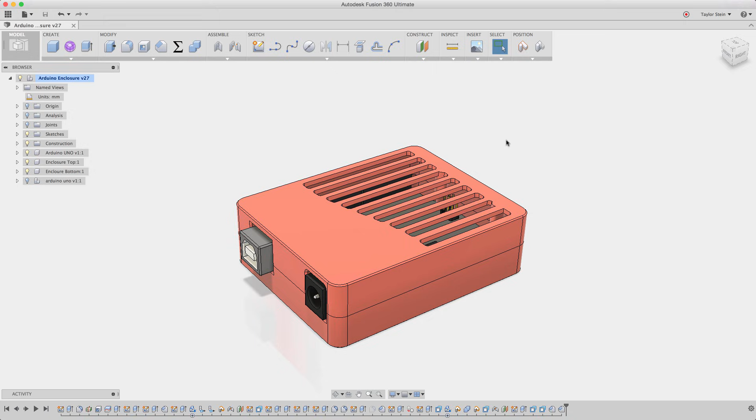Hey everyone, in this Fusion 360 video, I'm going to be teaching you how to design an enclosure for an Arduino Uno. I'm going to be recording myself along the way so you can see how fast it is, see my thought process throughout, see the mistakes I know I'm going to make and how I fix those mistakes, and hopefully learn a thing or two along the way.

So let's get started by creating a blank design. I'm going to start off by creating a sketch that really drives most of my design for this enclosure. I'll start by making a 2-point rectangle. Under Sketch, I'll choose 2-point rectangle, and I'm referencing some dimension drawings that I have.

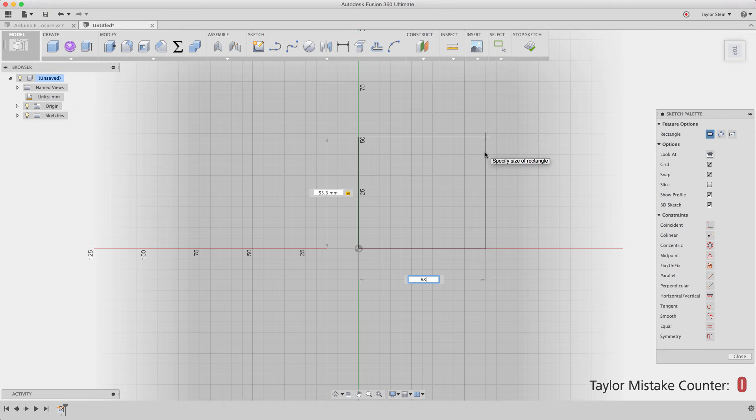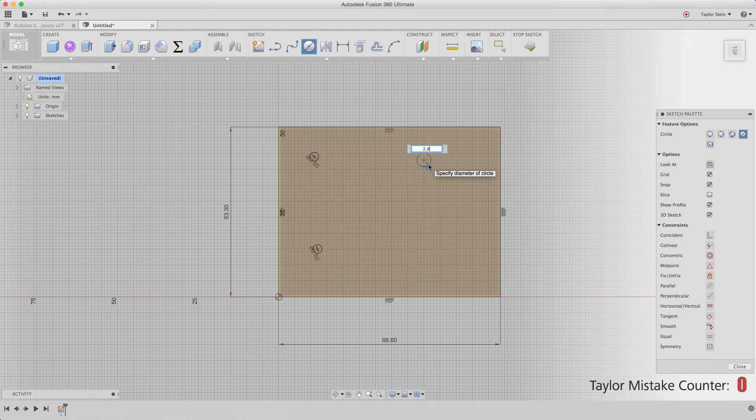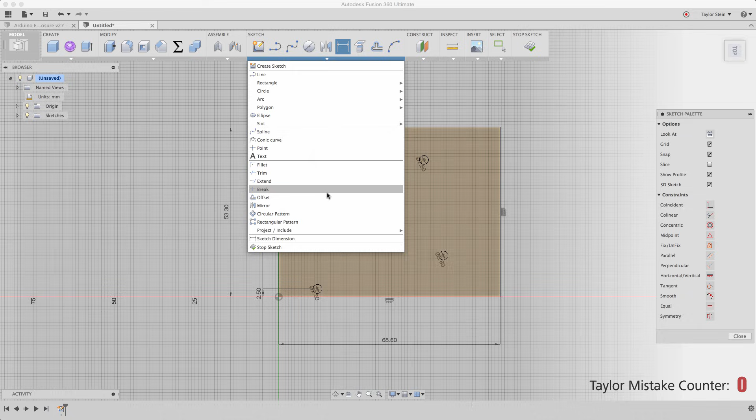Now, using that same dimension drawing, I can dimension these relative to my Arduino. I'm going to dimension that distance from there to here to be 2.5. Again, this is all under Sketch and Sketch Dimension. Now I'm going to dimension the distance from that center point to here, and that's 14. I'm going to repeat the command and dimension there to here, and that is actually 15.3. I made the mistake of thinking that was 14 as well. It's not. I made an enclosure that didn't fit. So make sure those are different distances.

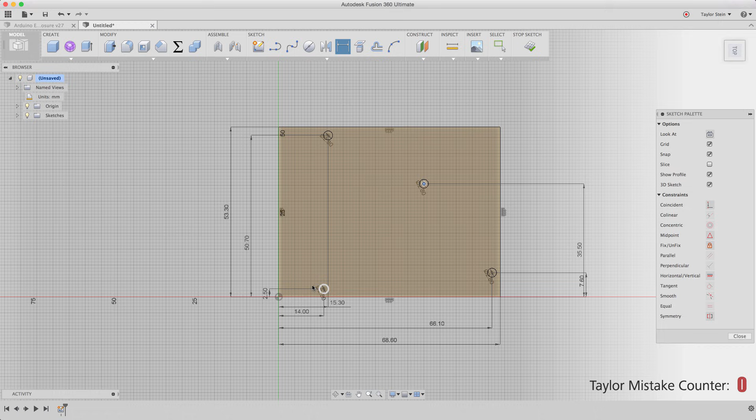I will set the distance from here to here to be 50.7. I'm going to go ahead and do the same thing for these. So this distance is going to be 35.5. It is best practice to dimension from two common edges, it makes it a little bit cleaner. And this one is 7.6. And lastly, we have a few more dimensions. Here to here is going to be 66.1. And this one is actually vertical from the other one, so this is 66.1 as well.

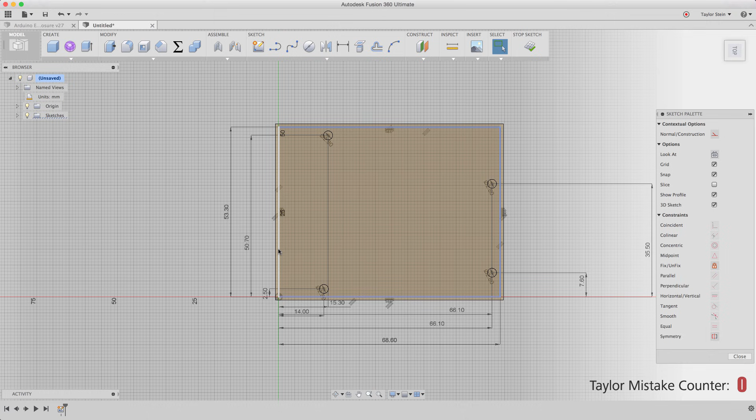So now I have the holes dimensioned up. I'm going to be building the enclosure around my Arduino, and I want it to have a little bit of wiggle room. I don't want it to have to fit perfectly within the enclosure, so I'm going to use the offset tool to offset this out by just 1 millimeter to give a little bit of space. Now I'll select these edges by shift selecting them, right click, and choose normal/construction to make them construction lines. I'll click stop sketch, and now I can choose extrude to extrude these profiles up.

Let me select these profiles, and this is really just the main form of my enclosure. I'm going to go with 22 millimeters tall, and there we have it.

The next thing I'm going to do is shell out my body. Let me go ahead and choose shell. What body do I want to shell? Well, it's the one I just created, so I'll click that. How thick? If I make it 1.6 millimeters, it'll actually just take two shells of a 3D print, with a 0.4 millimeter nozzle it's two shells, and I want to shell outside, so I'll click OK.

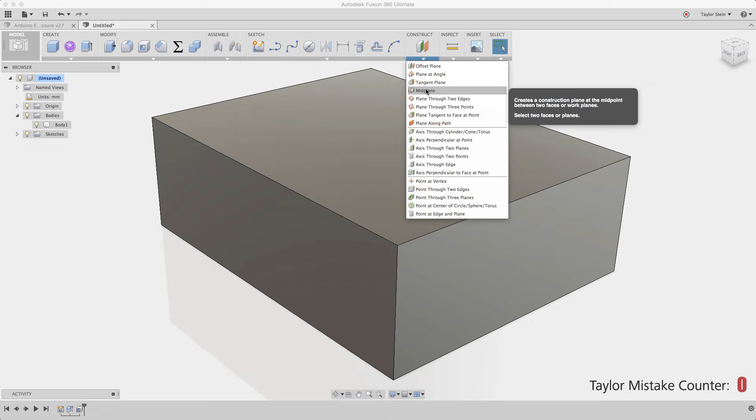Now I want to split this in half, so I'm going to create a construction plane that's a mid-plane between the top and bottom half, and now that will adjust to whatever size box I have. Let me go ahead and split the body with that plane, and now I have a top and a bottom half. I can turn off my construction plane.

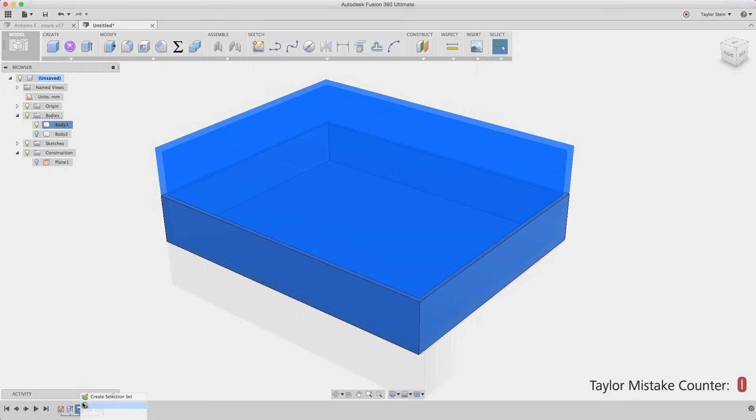And that looks a little thin. I might have messed up the shell, so let me right click on the shell command and choose edit. And what do you know, I did. So I'll make that 1.6, not 1. And outside, because I don't want to swallow up any of the Arduino, I want to create a shell outside of it. Now I have my proper shell that way.

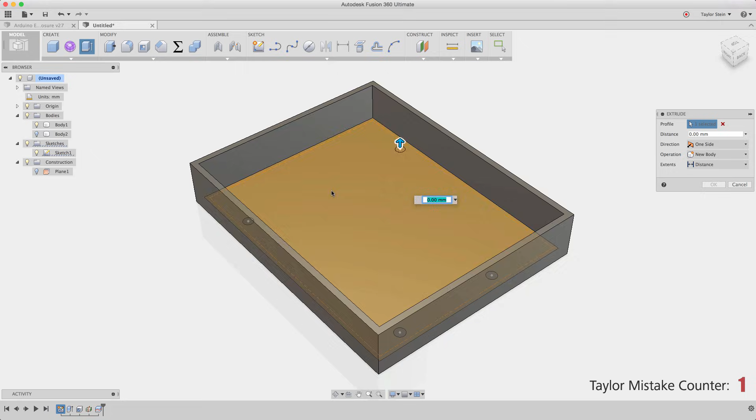Now I'm going to turn the visibility of my sketch back on, and I'm going to extrude these circles that I drew to create those mounting pins that are going to go through the mounting holes of my Arduino.

I'm going to extrude them up. I know to this surface it's going to be 11, which is half of 22, but I really want them to extend further so they can actually snap with the top part of this enclosure and hold it all in place. So I'm going to extrude 4 millimeters past this top surface, and there we go.

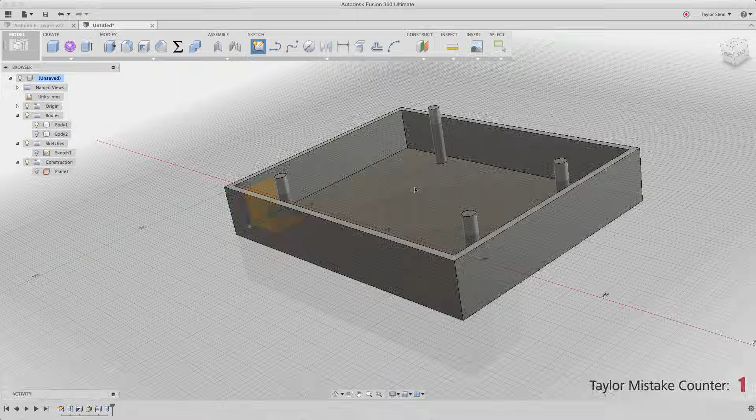The last step I have is to create some standoffs. I'm going to create a sketch on this bottom face and draw in some standoffs. Standoffs really help support the Arduino and bring it to a certain height. I'm going to make them 4 millimeters in diameter.

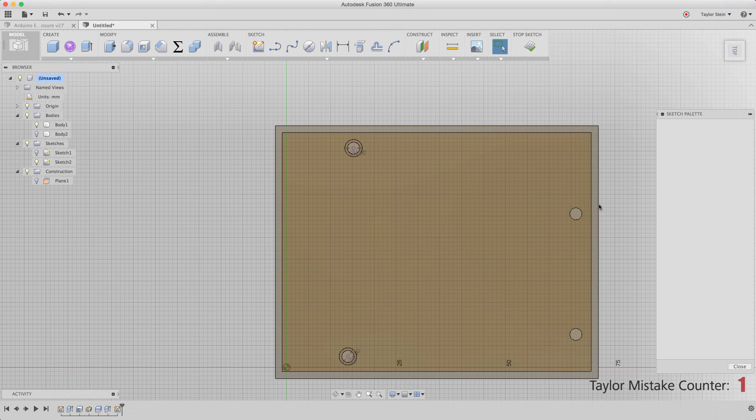This is because the Arduino doesn't lay perfectly flat on the bottom of the PCB. You have a bunch of extra metal and solder on the underneath side from all the connections, so you don't really want to place it on the bottom of your enclosure because it's hard for it to stay flat and hard to position all your holes for inputs and outputs. By using these standoffs, you allow yourself to raise it off the bottom floor of your enclosure and accurately create some cutouts.

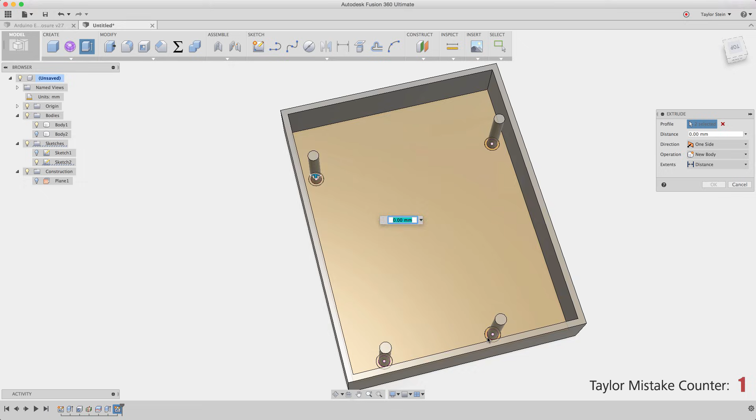Now I'm going to extrude these profiles up. If you take some measurements of an Arduino, you'll see that about 4 millimeters should be enough. Looks like I selected the wrong profile here, so if I hold Command, I can deselect that one and change it to that outer profile, and 4 millimeters should be enough. And there we have it.

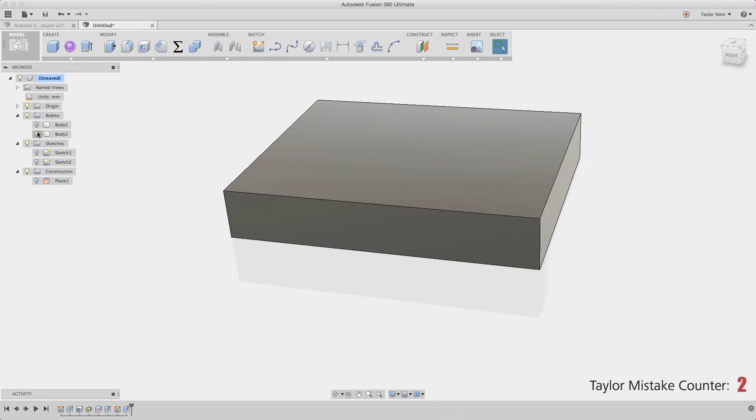The next step I have is to create some receiving parts on the top half of this box. I actually noticed I forgot to add some fillets here, so it doesn't look too nice, and I've already shelled it. If I filleted the outside here, I'd lose that uniform wall thickness, which would be pretty messy.

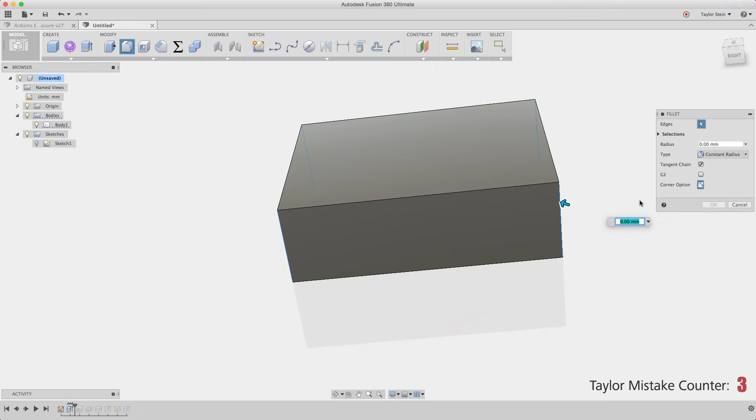So I'm going to drag my timeline behind that shell command, and now I'll apply a fillet here. That way I keep that nice uniform wall thickness, and I don't have to undo anything - I can just add a fillet. Maybe I'll make it 3, hit enter, and now I'll run to the end of my timeline. I can hide the top or the bottom, and you'll see we have that uniform wall thickness.

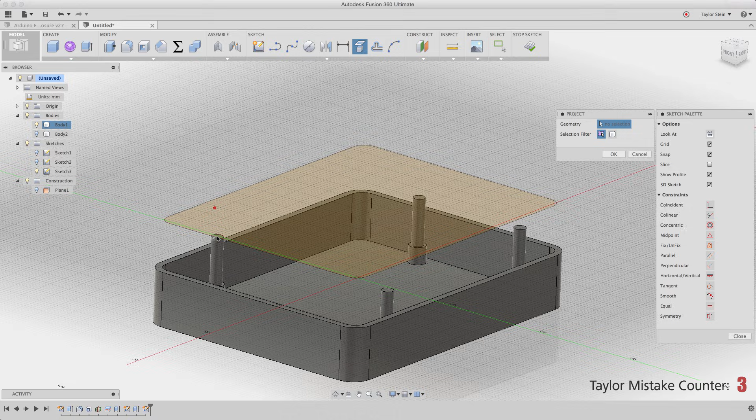Now what I'm going to do is create a sketch on this face, and I want to project in the pins that I already have so I can reference them. I'll choose project, and select that surface along with this one and this one. I'll hide that body, and now I have those profiles - I'm going to select them, and just make them construction lines so they don't get in the way of any profiles. Now they're just there for reference.

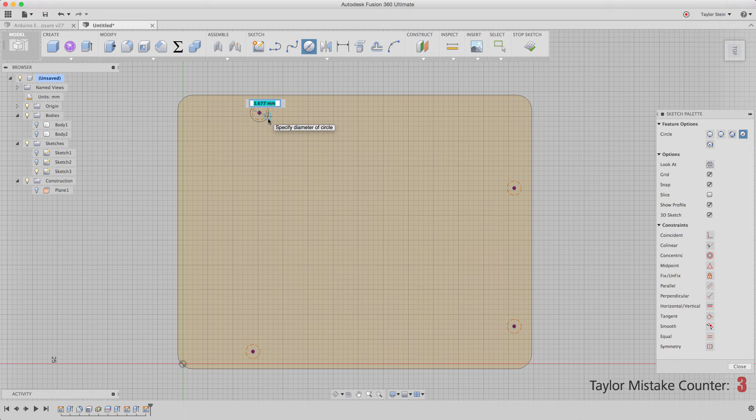Now I'll make the hole for what those pins go into, and I'm going to make this a 3.2 millimeter hole. If you remember, my mounting pins were 2.8, so you can learn the hard way that if you make the mounting holes 2.8 as well, it's not going to fit in there - you'll have a hard time snapping this lid together. So I'm going to give it a little bit of clearance so everything fits nicely.

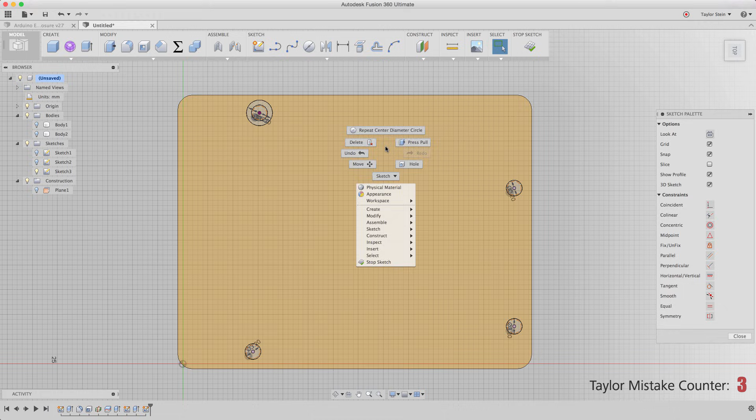Now I'm going to make this 5.2, that way these receiving portions are actually 1 millimeter thick around in radius, or offsetting the diameter by 2 millimeters - so 5.2. I'll do the same over here, 5.2.

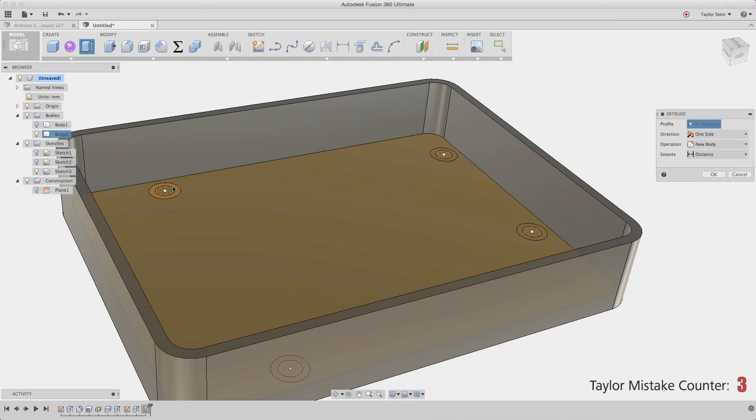I'll click Stop Sketch and turn on the top part of my enclosure. I'll extrude these profiles. How far do I want to extrude? Well, it's 11 to this top part, and I know I have 4 millimeters of overlap from the pins. I may want to offset this, maybe just make it 10 millimeters so they're slightly lower than where this is splitting, just to keep things clean. And I still have 3 millimeters of intersection between them.

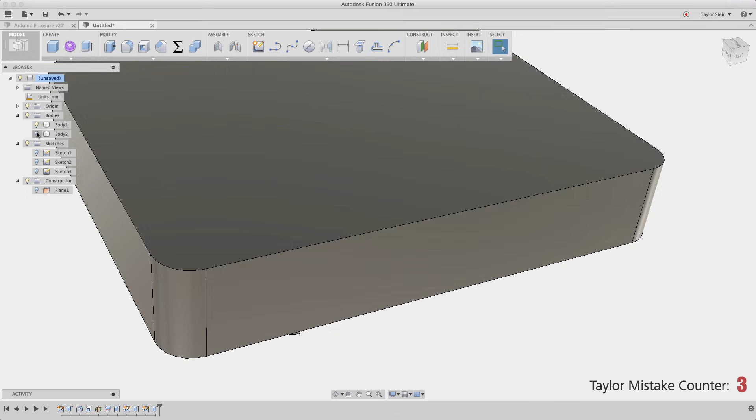Now if I come over here, one quick thing I'm going to do is add a small chamfer. I like these to ease into the slot, so I'm going to choose chamfer and chamfer off the top of these pins so we can gradually push them in. If I do a 0.4 millimeter chamfer, that'll be nice - it's a factor of my layer height, which is 0.2 millimeters, so it should create that chamfer no problem.

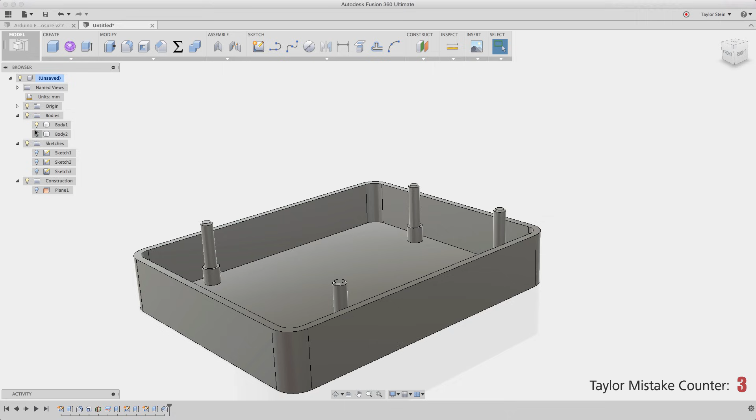The next step I have is bringing in an Arduino. So I went ahead and downloaded this online, imported it to my project, and now I can right click and choose Insert. So let me bring in this Arduino.

And there it is, I'll click OK. I'll close the data panel, and I'll quickly create some components out of the bodies. That way I can actually create an assembly.

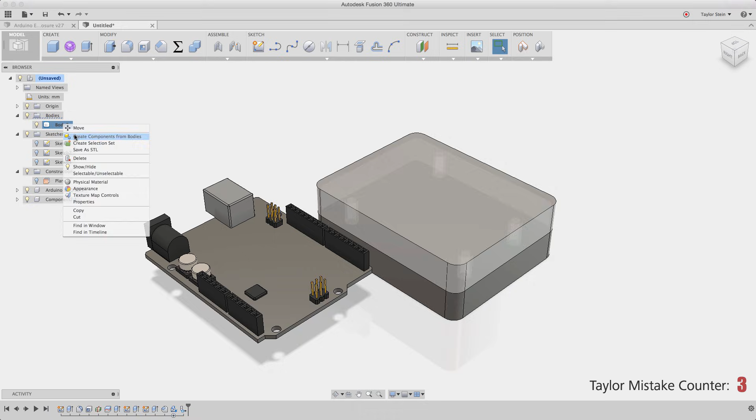I'll right click and choose Create Components, and now you can see I can move the parts all over the place. So I'll click and rename this to be Enclosure Bottom, and this one Enclosure Top. I'll right click on the bottom and choose Ground so it doesn't go anywhere.

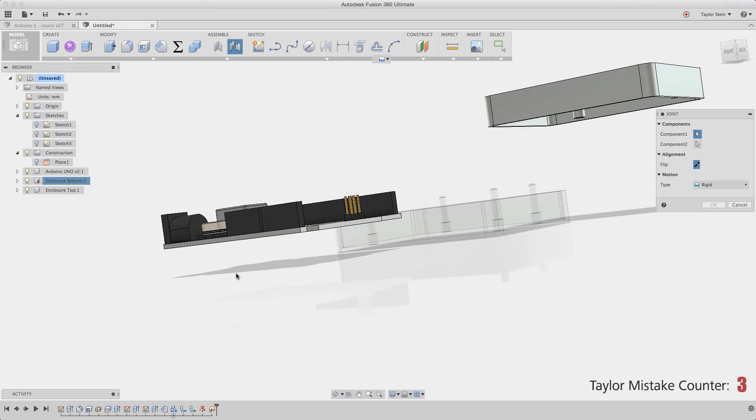Now I can apply a joint. So which pieces of geometry do I want to align? Let's align the bottom of this hole to the top of this standoff right here. Let me orbit around, and how about like that? Now you'll see that it brings those two pieces of geometry together.

I have a rigid joint, and let's look at it from the top. Everything looks great, so I'll click OK.

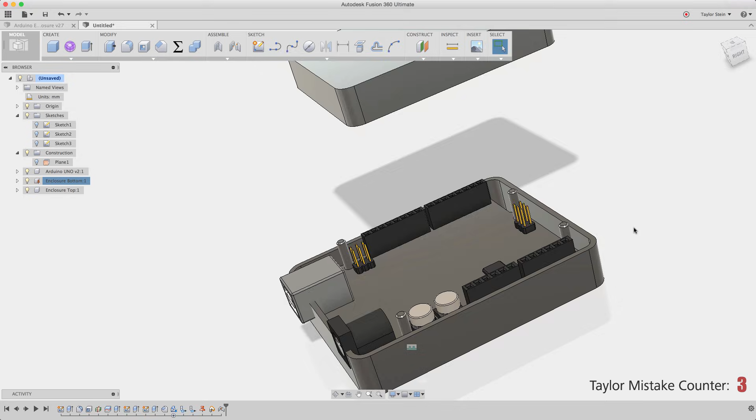Now I can add one more joint to place the lid on here. I'll choose joint, and let's align that with... let's zoom in. Let's see if that worked. Oops, let me try it one more time. Repeat joint, and let's go with that point and that point. There we go.

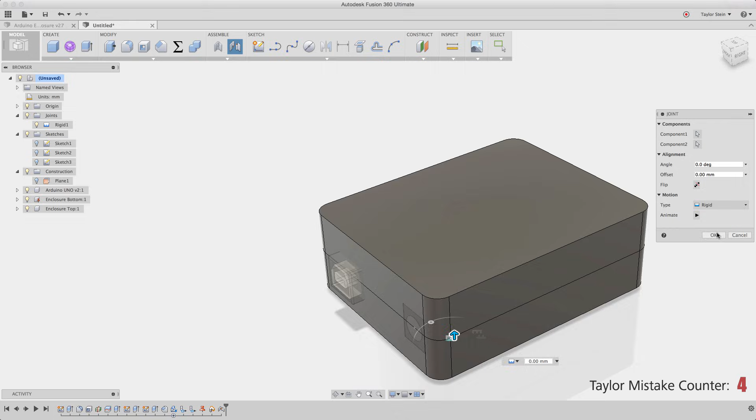I'll do rigid. I could do slider to kind of animate it moving up and down, but I'll leave this at rigid and do some animations later. So there we have it. We have the top and bottom in place. We have an Arduino in there and it looks great.

A few things we need to do are make some cutouts. So I'm going to create an offset plane on this surface, then create a sketch on that offset plane. The reason I didn't sketch on this face is I didn't want to bring in this geometry necessarily. I just wanted a clean sketch on that face without bringing it in. So that's a little bit of a tip right there.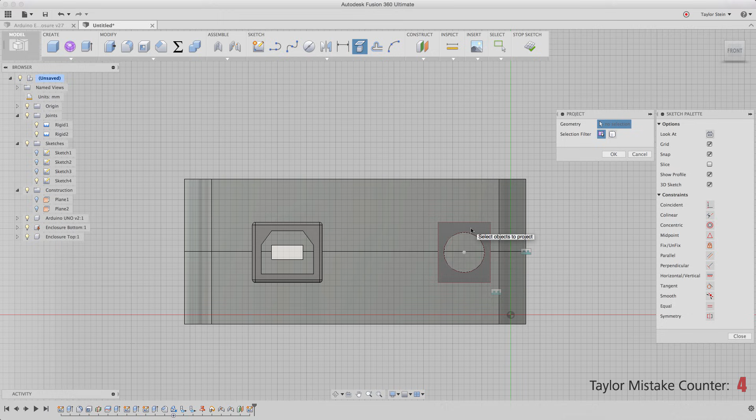Now what I'm going to do is project in some geometry from the Arduino. How about this port right here? Now I can start projecting in some of these edges that I'd like. How about just the outer perimeter? It's not registering it as a loop, so I'm just going to have to click these edges myself. Not too bad, and one more over here. I'll click OK, and if I hide the Arduino, you'll see that we have those profiles.

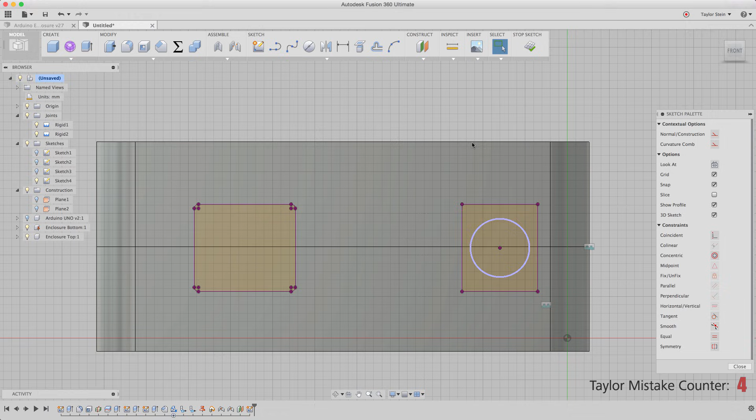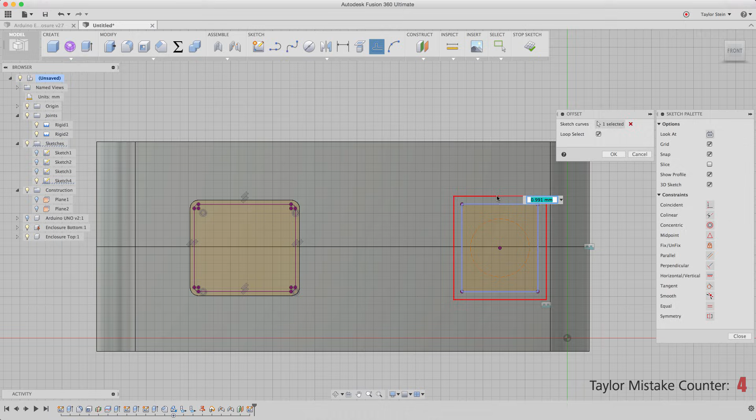I'm going to make this one a construction line again, so I have some cleaner profiles. And I want to offset this slightly because this is the exact size of the components that are sticking out of my Arduino, and if they're slightly bigger or smaller or at a different angle, I want this to still fit. So I'm going to choose offset, and offset by maybe just 0.5 millimeter outside, give myself a little bit of wiggle room, and offset this 0.5 millimeter as well.

I'll choose stop sketch, and now I can extrude those two profiles. Let me click on both of those, and if I go in, I'll make a cut. I want this to be dynamic—I want it to adjust to the thickness of my Arduino. So instead of just extruding them blindly some random amount, I'll extrude them to this inner surface, and now when my wall thickness changes, so will that extrusion.

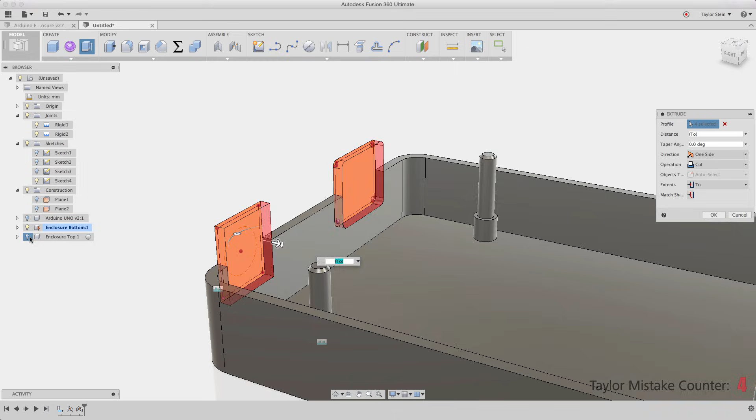Before I click OK, I'll make sure that my top enclosure component is visible as well, so it cuts through that component just like that. And if I turn my Arduino visibility on, now you'll see it poking through.

You might be wondering, why are you making an enclosure for this if right now we can't actually access the pins in my Arduino? It's pretty hard to prototype with this—we'd have to take the top off, and that's a little bit of a pain.

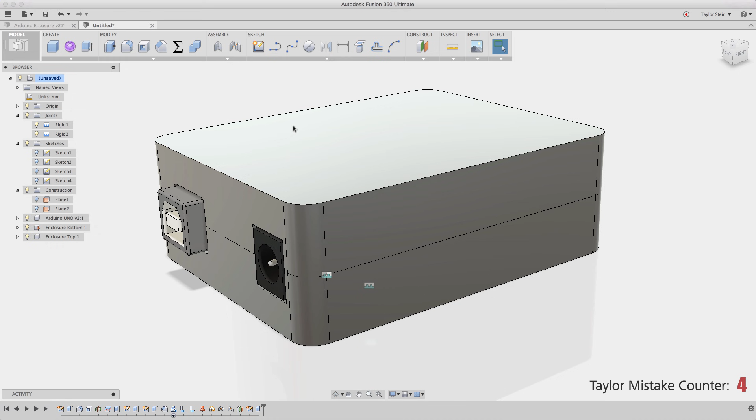So what I want to do is make some cutouts on this top surface so that I can access those pins. Let me just project in some of that geometry from the Arduino. I don't want to project in all of this mess—I just want to project in how about that corner, and this corner, and then this one, and this one.

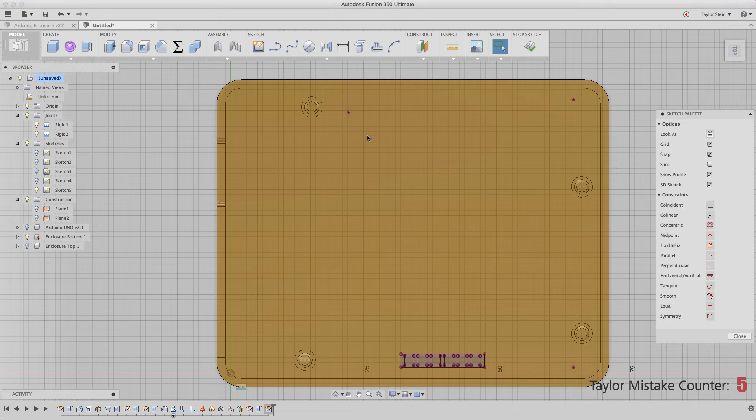I'll click OK, hide the Arduino, and now what I can do—oops, I guess I messed that up. Let me try it one more time. Project, and give me this corner.

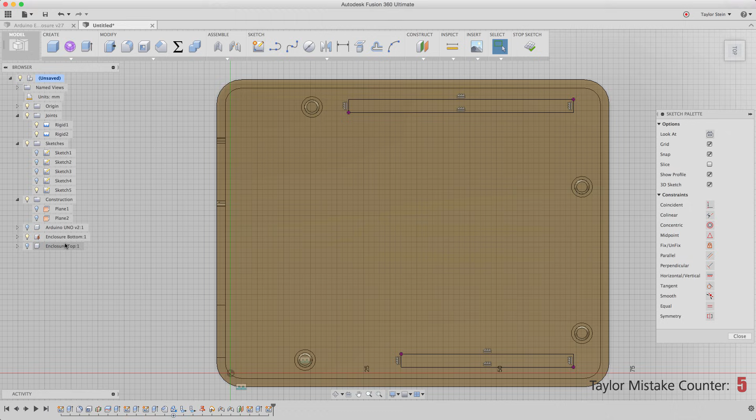There we go. Now what I can do is just draw some 2-point rectangles to kind of snag that geometry. So I'll click here, and here, and there, just like that. And if you'll see right now, it matches up perfectly.

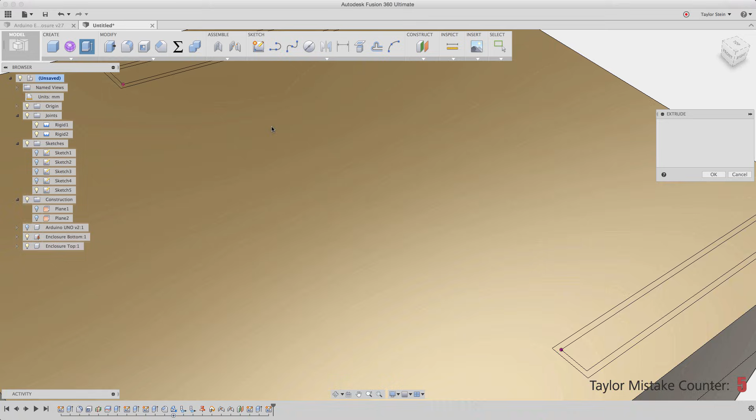Again, I might want to give myself a little bit of wiggle room. So how about if I do an offset of 0.5 millimeters, and I'll do it again over here, 0.5 millimeters. I'll click stop sketch, turn on the top, and now extrude again. I'll choose extrude these two profiles, and I will again do an extrude to this inner surface.

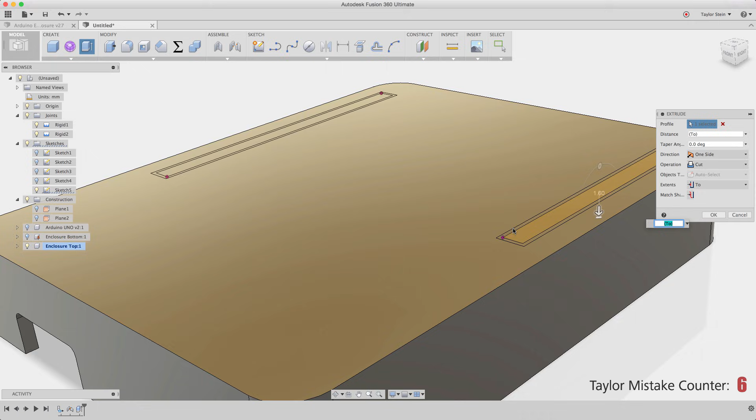Oops, looks like I selected some profiles. Let me deselect those and try it one more time. This profile, and holding command, let me click that one, and this one, and this one. There we go, so now I have that extrusion.

I have access to my Arduino pins, and everything looks pretty good. I could print this out and it's a working enclosure, but I want to make it look a little bit nicer. So how about I add some chamfers to the top and the bottom, and again I'm just going to do a factor of my layer height, which is 0.2 millimeters, so 0.6 works pretty well.

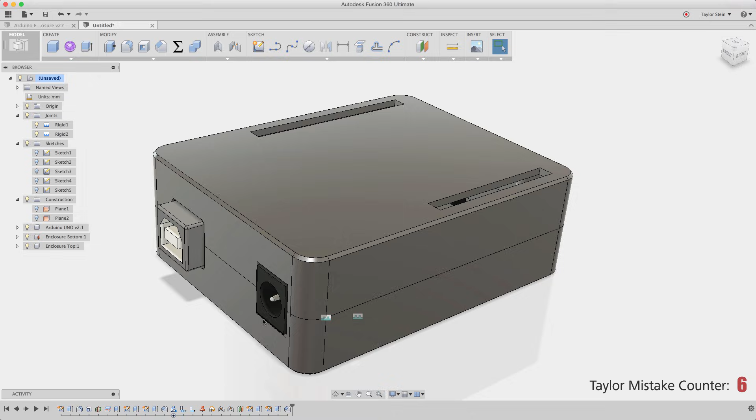And then if I look at it from the top, I don't really need all of this closed off area. It doesn't look super nice, and I want to add something a little bit more artistic.

So how about I create a sketch on this top face, and I'm going to draw a line here from this corner to this corner, so that's from one hole to the other. I could draw another line from this corner to this corner, but I don't really like the way it blends in with these curves here, so I'm actually going to use the spline tool and draw a spline from this corner to this corner, and then I'll move these handles around to make it tangent. So I'll click on the line and move the handle to that corner, and there we have it.

So now I want to create this sort of grill pattern, and to do that I'm just going to draw a construction line that goes all the way down at a 90-degree angle. I'll left click and select it, and right click and turn it into a construction line. And now I'll draw one sort of arbitrary line that goes perpendicular between those.

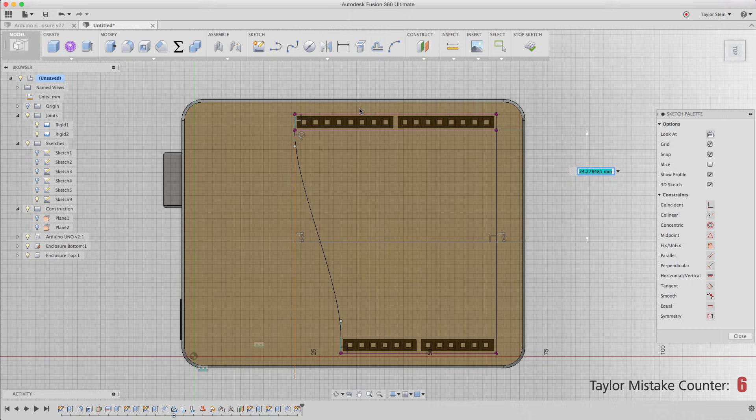This is how I like doing it, just making it arbitrary and then dimensioning it to make sure it's where I want it. And if I have these 3.5 millimeter openings, I can do a quick measure to make sure they are 3.5. Let's see. And let's try that, restart the selection. Here to here, 3.5 millimeters, and end to end we have 52 millimeters.

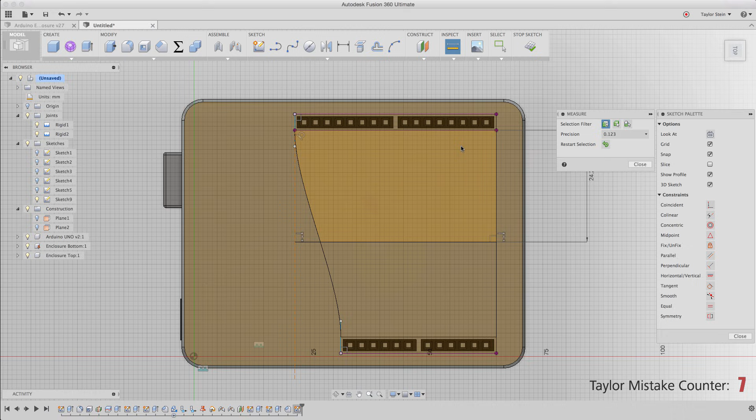There we go. I can know that if I have a certain number of these openings, I can calculate the spacing in between. I believe when I did this last time, I wrote it down. If I had 9 openings and 8 full spacers in between, I wrote down the width of that spacer to be 2.5625 millimeters. You can do the math on that, I think that's right.

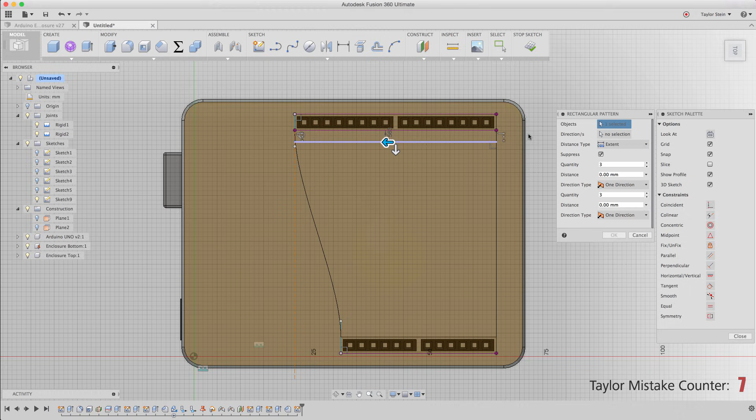What I'm actually going to do now, instead of drawing these lines at that spacing, 2.5625 then 3.5, I'm just going to use a pattern. So I'll just do a rectangular pattern, this object and this object in this direction. And now how far do we want to do it, what's the extent of this pattern? I really want it to end up here, but what's this exact value?

It has something to do with those 3 numbers I mentioned. So it starts with 52, and then we can subtract the distance for 2 of these 3.5 openings, which is 7. You can just start typing in some numbers here to make sense. And then let's lastly subtract that 2.5625 we have up at the top here, and now you'll see it ends perfectly.

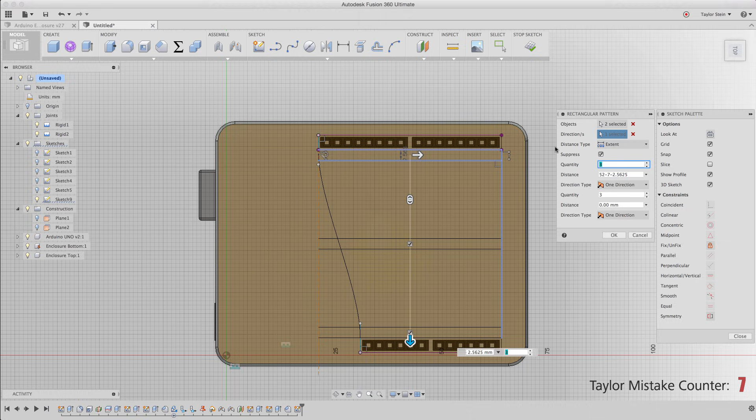And how many of these do we want? We're going to have 8 of them like I mentioned. I'll click OK, and I'll do a quick measure to make sure that this is still 3.5, and that any one of these small ones is still 2.563, but we'll add another decimal, and there's 625. So I'll click Stop Sketch.

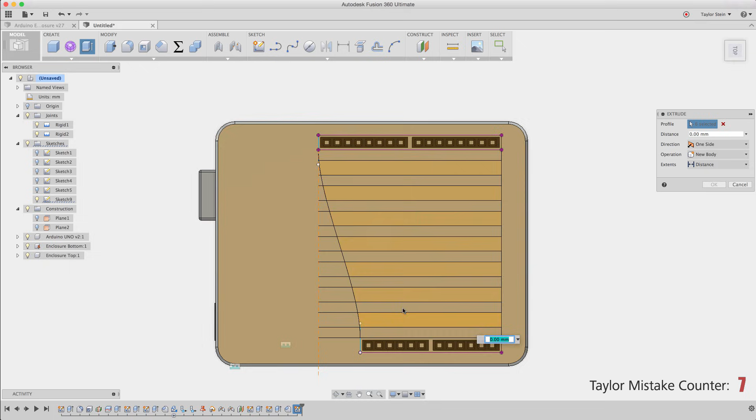I'll choose Extrude, I'll select these bigger profiles that I'd like to cut out, and I'll just hide the Arduino and the bottom. I'll say Extrude 2, that way if I change the thickness, it will update. I'll click OK, and now I've made that nice looking cutout. So I can turn on the Arduino and the bottom, and there we have it.

So that's how we can model an Arduino Uno enclosure. I think we did that in about 20 minutes.